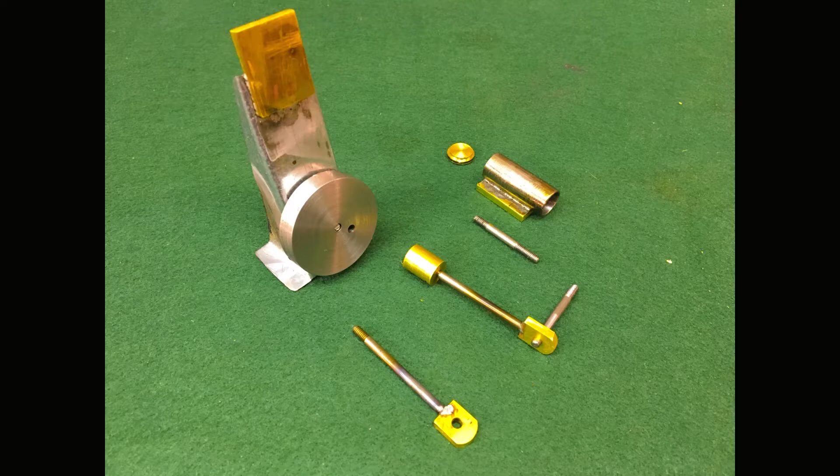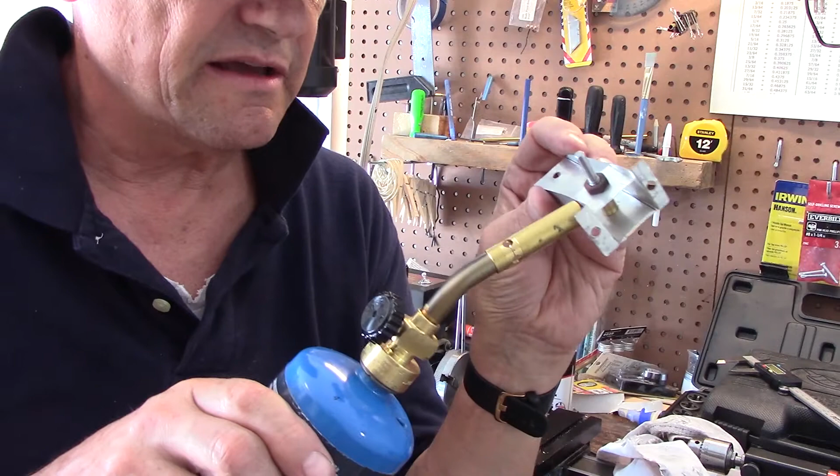These two are parallel. Now I'll take the Bernzomatic torch and solder that plate right in place. Once it's nice and soldered, I'll just take that out.

Okay, I'm drilling the other side. I moved it over a quarter of an inch, drilling the center hole. That's through.

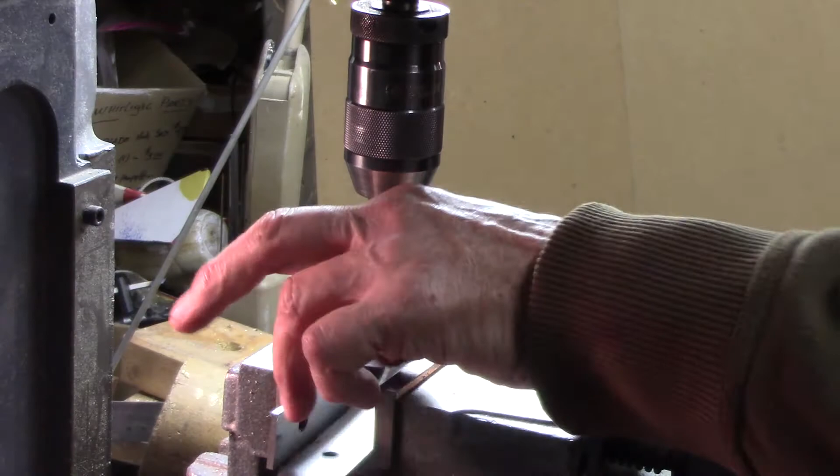Back over at the workbench, I got some 1/8 inch stock. I'm going to mark this off at 2 inches with the Sharpie, and then just hacksaw it off. That'll be the shaft, and the crank pin shows 3/4 of an inch, so I'll mark it off at 1 inch and trim it down to 3/4. All right, there's roughly 2 inches. Cut that first, put it in there.

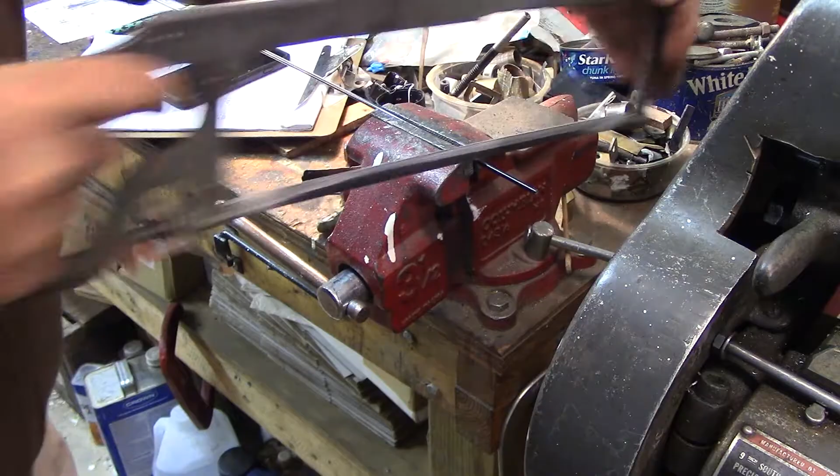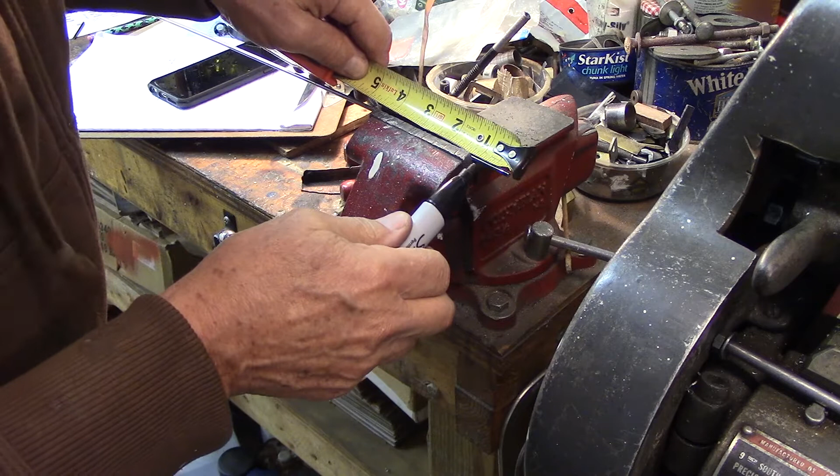Just mark it at 1 inch. Give it a little room.

We're back out in the shop this morning. It's a little chilly in Virginia, mostly rain though right now. The snow is all melted. I got the shop up to 55 degrees with the wood stove, and that's keeping my coffee warm.

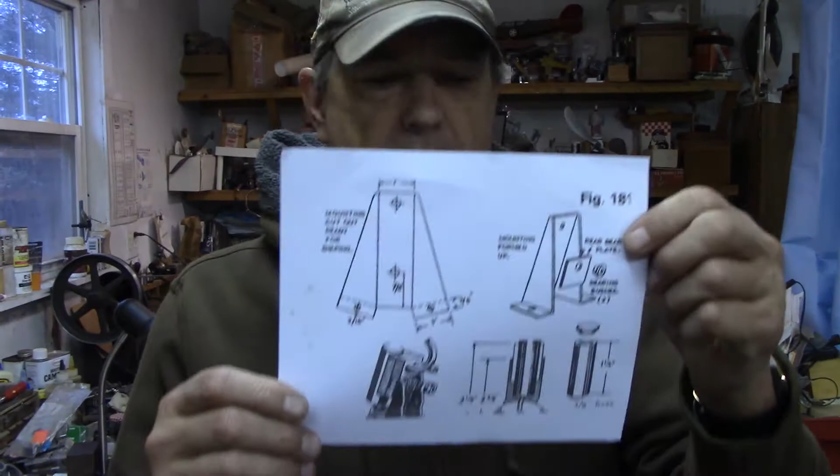So we're back to working on the little oscillating steam engine from Vic Smeed's boat book, Boat Modelling by Vic Smeed. This is the engine, this is the book, and this is the picture of the engine that was in the book. I blew it up.

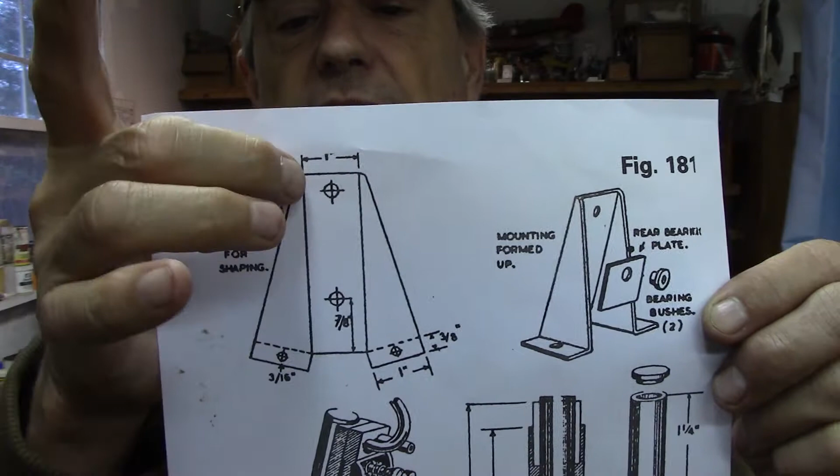So the frame of the engine is sheet metal, and I have discerned that it's about 3 inches by 1 inch on the main plate, because it shows 1 inch here and here. If you measure it out, it works out.

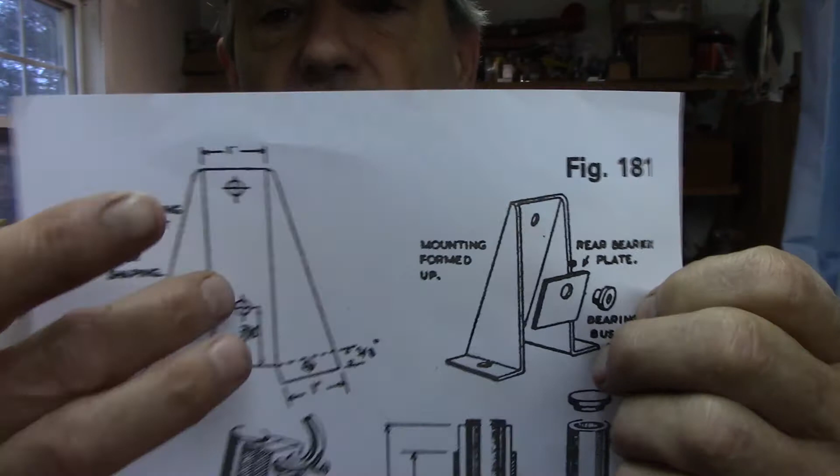So I'm going to fold that up today. I've already made one, but I think the metal was a little thin, so I'm going to try another one.

I've got a piece of sheet metal from ductwork underneath a house. We were doing some work on a house and had a lot of leftover at my house. So years ago—this piece is probably 10 years old. But it measures 19 thou, and it's pretty stout, and it solders easy.

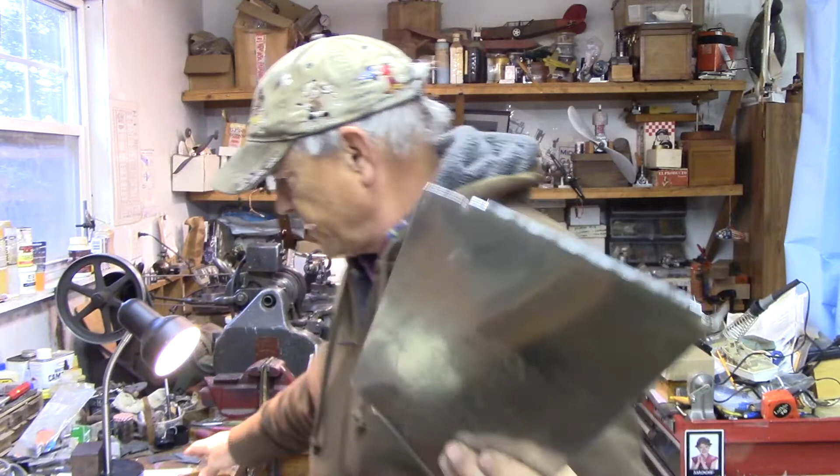You can cut it with regular aviation tin snips, which I have here. These are the straight ones. They make these in left, right, and straight.

I got to studying this diagram, and if you don't have 1-2-3 blocks, and you do any kind of layout work or model making, these things are great. They measure 3 by 2 by 1, and they're guaranteed parallel and 90 degrees on the edges, so you can just use them for everything.

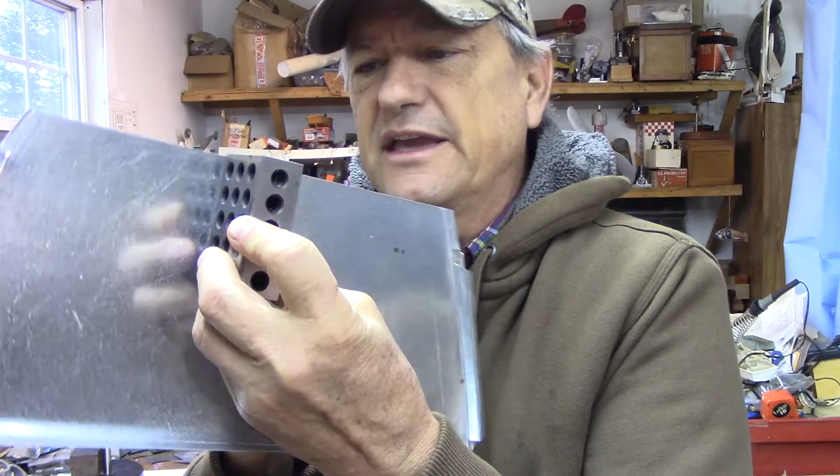So I'm looking at this diagram, and it's 3 by 1. I'm going to use a 1-2-3 block as a folding die—I don't know what you'd call it—a pattern to make a nice accurate little engine frame for this oscillating steam engine. Hopefully it'll look like this when I get through.

This drawing—a lot of the dimensions just aren't there. It was kind of an illustration in the book, I think for the author to illustrate what was possible to the reader.

But I think, combined with some other engines I've made, adding all that information together, I came up with a 3/8 inch bore. I have a little piece of 3/8 inch brass there—3/8 inch bore and a 1/2 inch stroke.

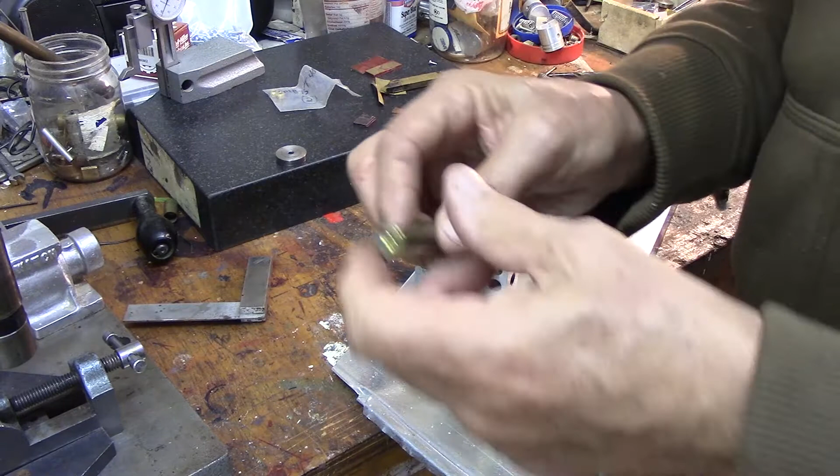I went to a reenactment a few years ago and picked up some of these blank shells. They were blanks, and they let you pick them up after the battle. These might make really interesting cylinders for the steam engine. I have several of them—I think I could cut them off and polish them up, and they'd make nice cylinders.

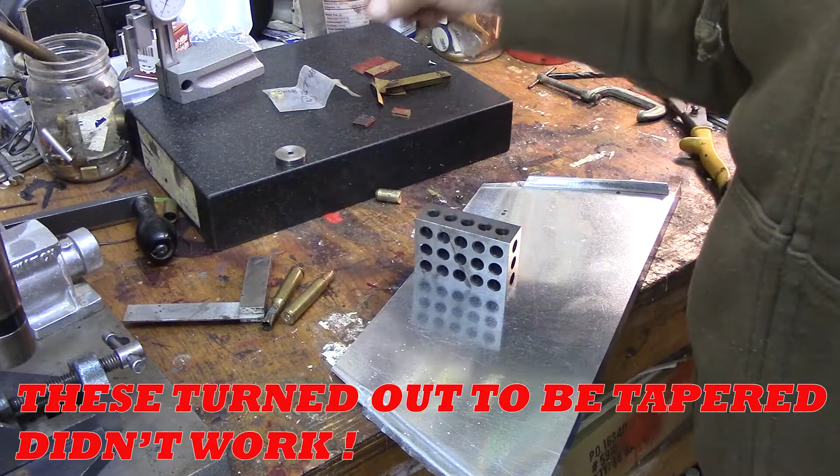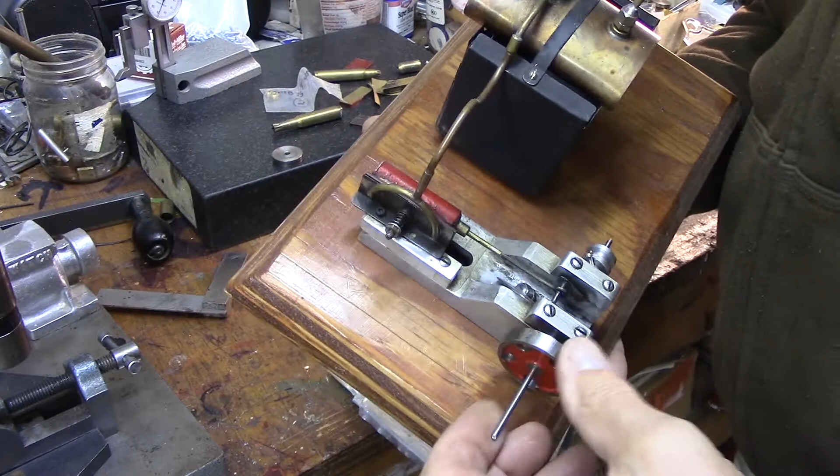Before I do this, I'm going to go get one of my other steam engines to show you the principle of how it runs. The engine design came from the FizzWiz, and it's an oscillating engine. The cool thing about this engine is it's double acting, so that's why both ends of the cylinder have to be sealed.

It has a 3/8 inch bore, but I used a steel cylinder plate, which of course is subject to rust. It works—I keep it oiled up, and it does run. It's dual acting; it's supposed to be self-starting.

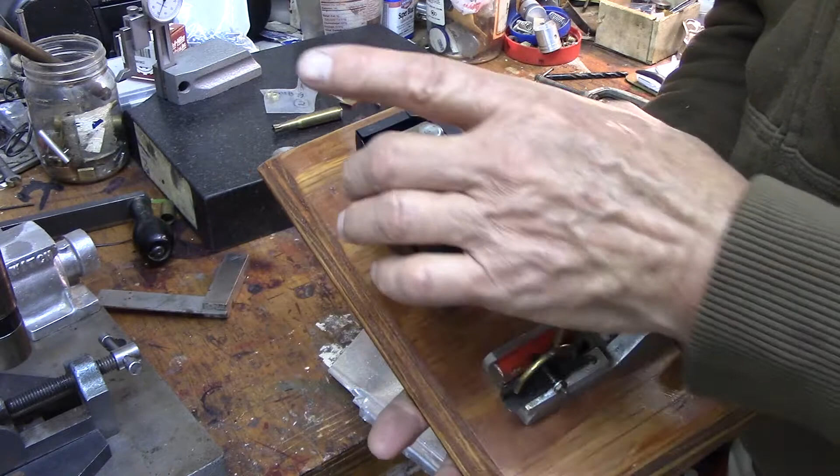I've got this little homemade boiler. I might do a little round boiler for this engine I'm making, because my intention is to put it in a small boat. But this is an oscillating engine, and it's going to be about the same size. The frame won't be the cast frame I have here—it's going to be sheet metal, and it's only going to be single acting, just to keep everything simple and easy.

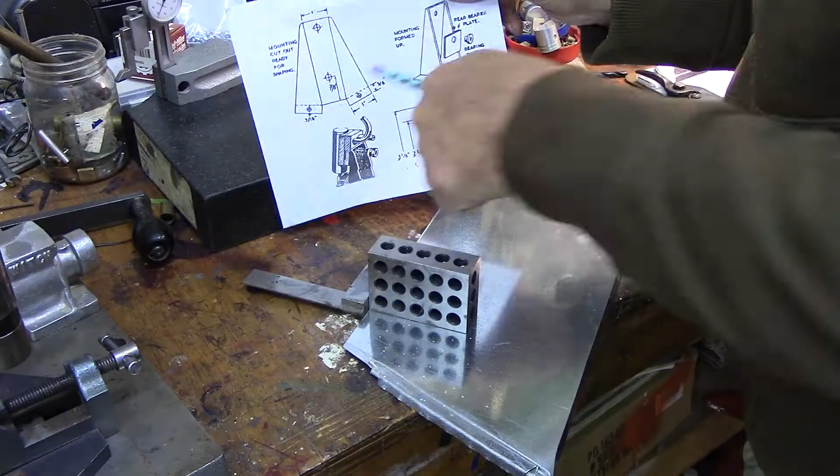I'm just going to lay out a rectangle and then put two kind of ears on it here using the 1-2-3 block. I'm not worried about getting so-called permanent magic marker on my 1-2-3 block, because all you need is some alcohol—I have a jar of denatured alcohol. Denatured alcohol will clean epoxy off your fingers too, by the way, if you get epoxy on your fingers.

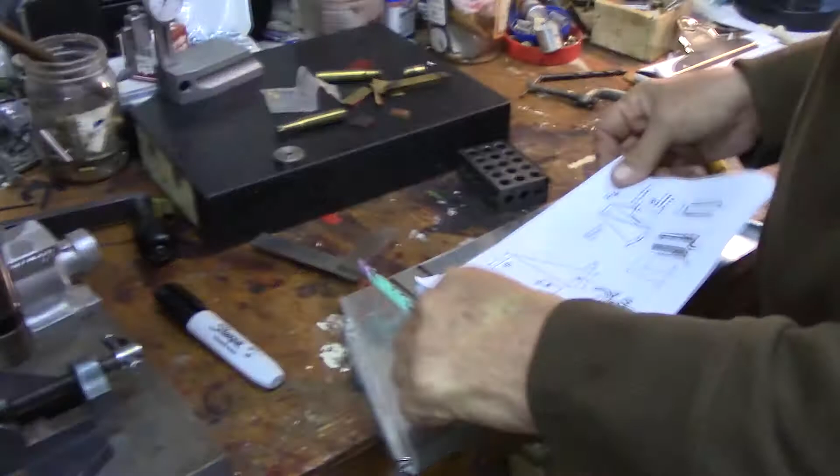So there's the layout—that's the start of the engine. Now I have to figure out what this angle is right here. It's kind of an odd angle, but it measures 73 degrees. I want my model engine to look like the picture, so the information's in there—you just have to get it out using the picture.

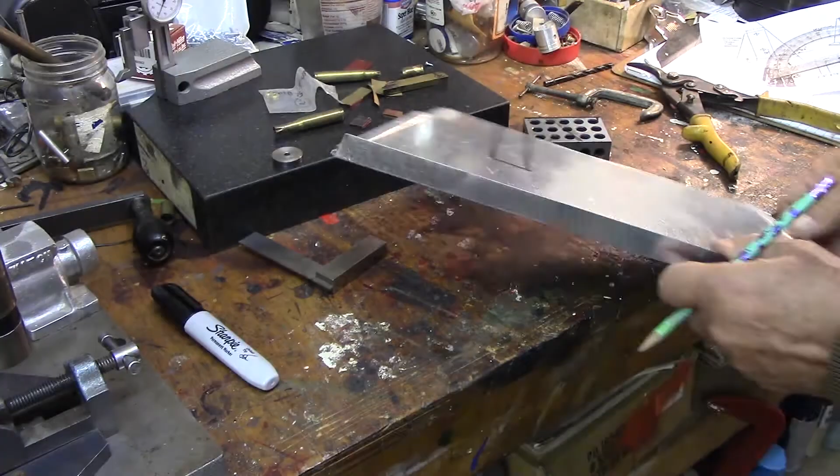Some denatured alcohol from Lowe's. Clean up your block too.

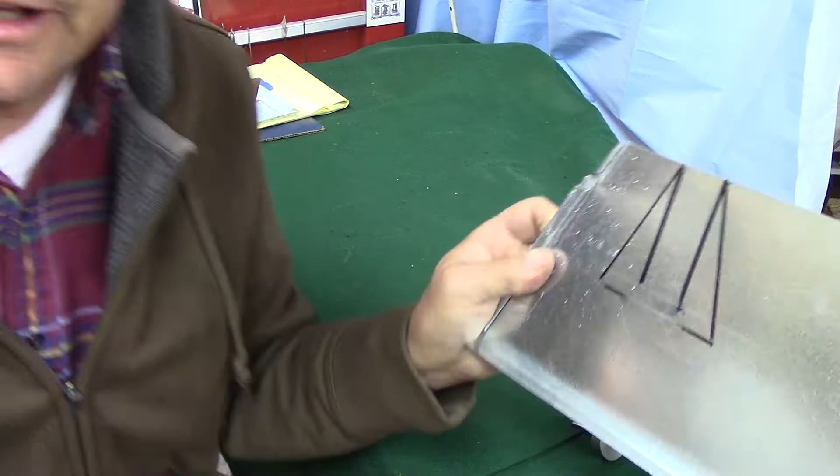Alright, I've got lines marked off that I can see adequately. As Jed Clampett used to say in the Beverly Hillbillies, I'm going to commence to whittling.

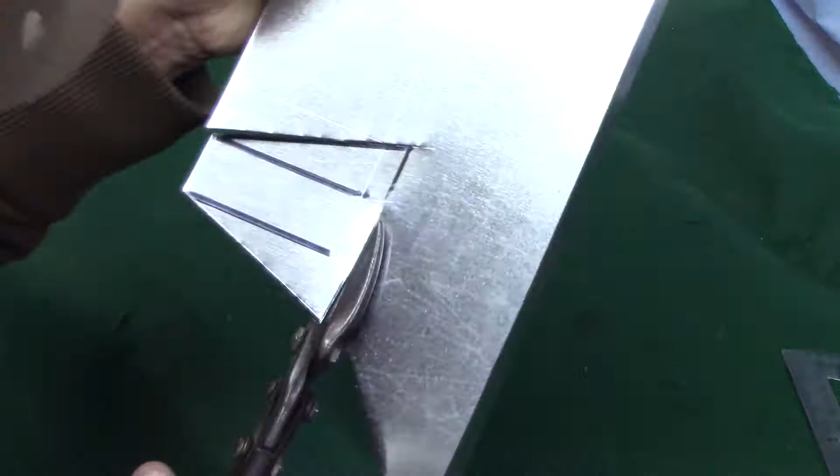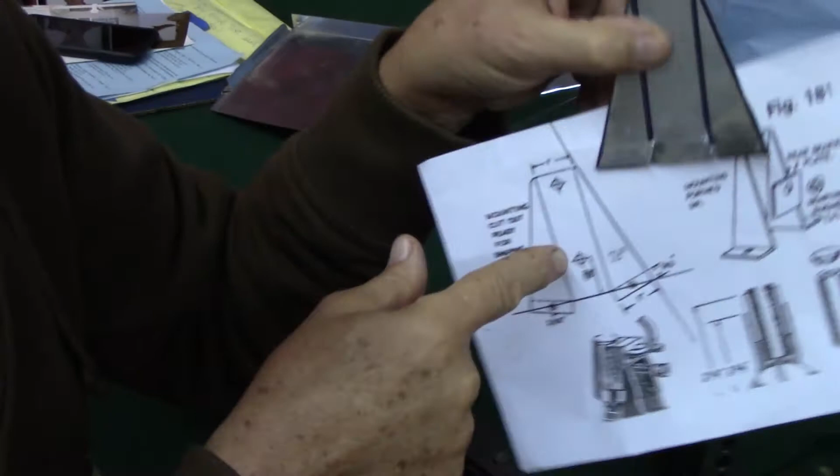There it is. Now another way to do this that I did on the first one I made, I just blew this up. I kept blowing this up on my printer until it measured 3 inches, and then I glued that pattern right onto a piece of metal.

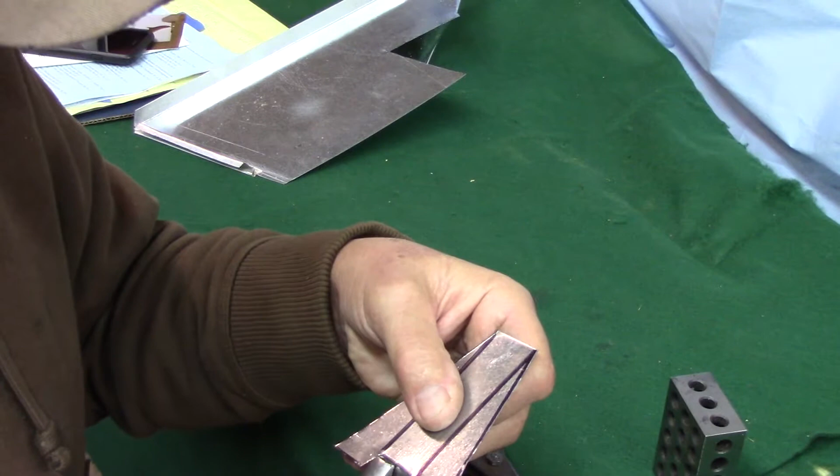Cut it out that way, and that worked. So this has to be cut off and these have to be bent 90 degrees. We do that in the vise, or we'll just do it with some pliers. You could use vice grips on this. Just snip this off.

This is going to be rough, but I'll clean it up on the grinder. These aren't too sharp. What a mess. I'll bend these in the vise.

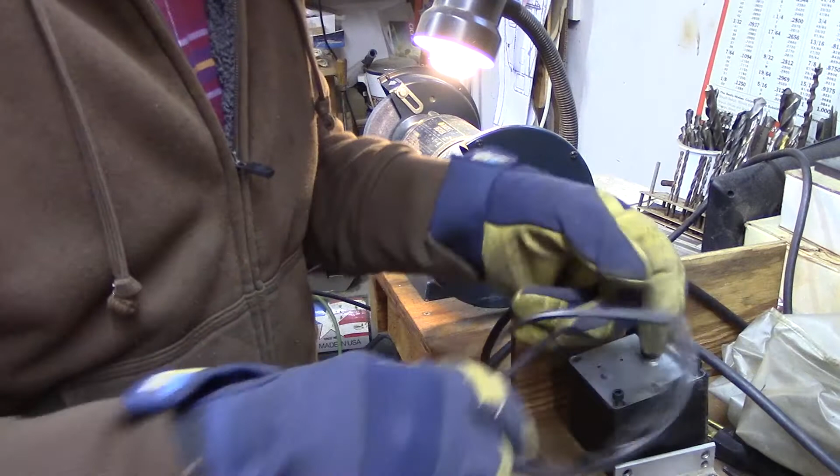Sheet metal work at the grinder's really dicey, so I'm wearing gloves because it'll get hot. Metal's sharp, and I'm wearing my safety goggles. Pretty good for now.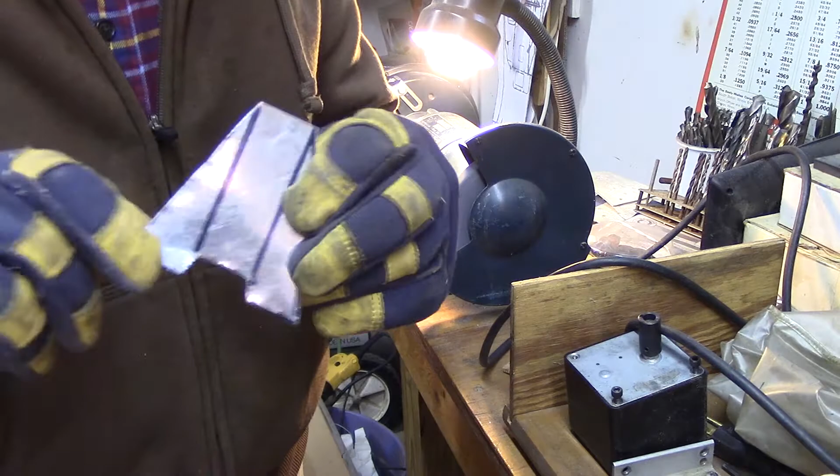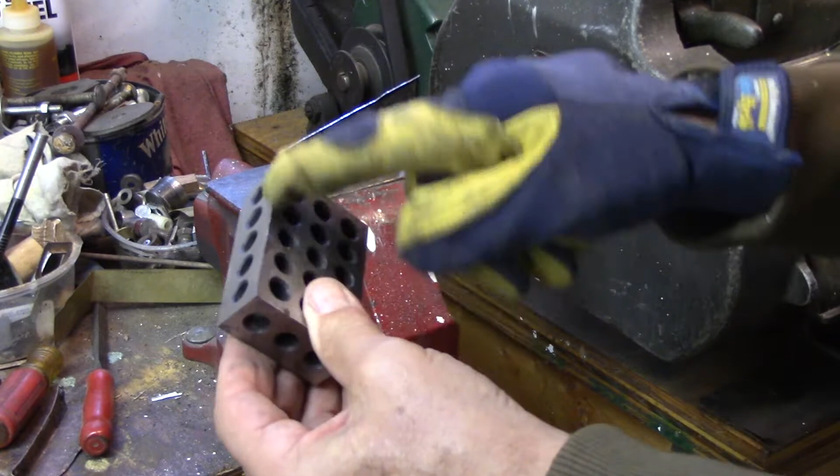I'm just going to start it here, then finish it with the 1-2-3 block because it has a nice square edge. I'm just going to start it on the vise here. I'll make sure to go the right way. Does it matter? I guess it doesn't matter as long as I do both of them the same direction.

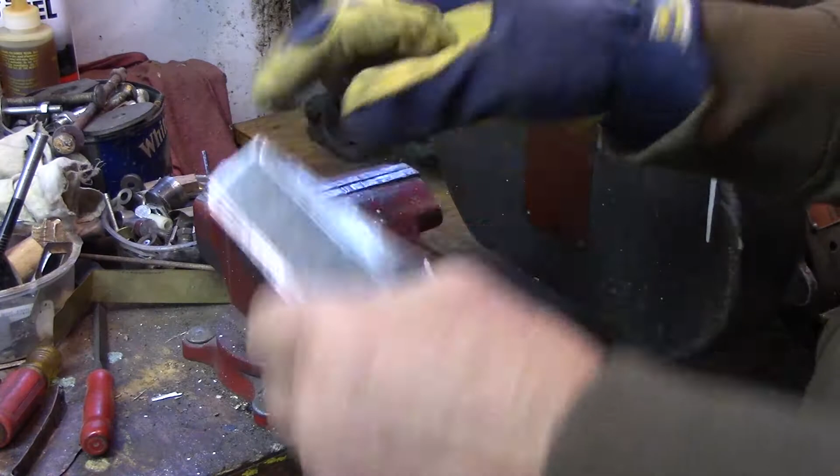That's pretty good. That's one. Important that this is parallel. Now you can't get it square because the geometry of the vise won't let you, so now you go to the 1-2-3 block.

Put my homemade soft jaws in here so I won't scratch up the 1-2-3 block. This was just a piece of copper pipe that I bent to make soft jaws so that it doesn't scratch stuff up when I put it in my steel vise jaws. Of course, you can buy soft jaws, plastic or aluminum soft jaws.

I hope that gives me enough room. Try something, try. I don't know if this will work or not. Oh, it's kind of making a mess.

I guess the pros would use a bending brake on this. Now I need to do these. Something doesn't look right on those tabs.

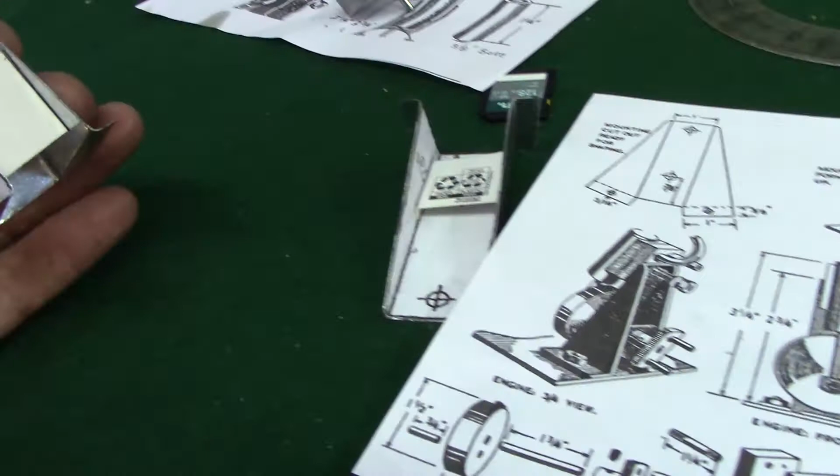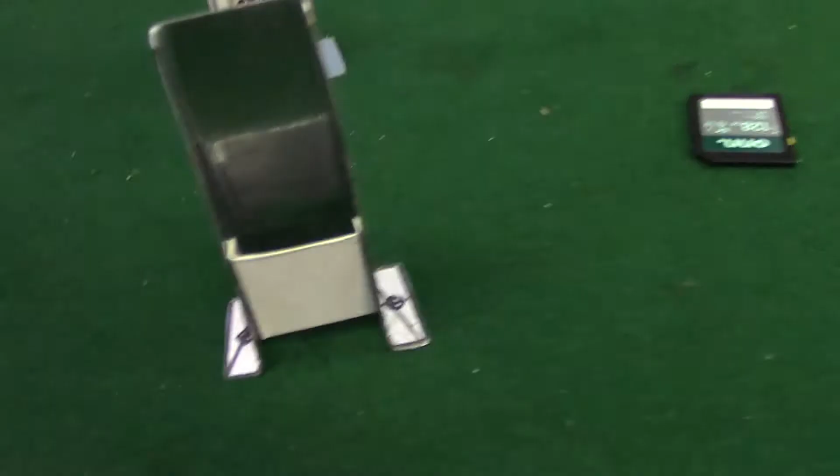So I have folded up two of the frames now. And the next step is to make this little piece here, this little back plate, which you can call the bearing holder, bearing support. They call it the rear bearing plate.

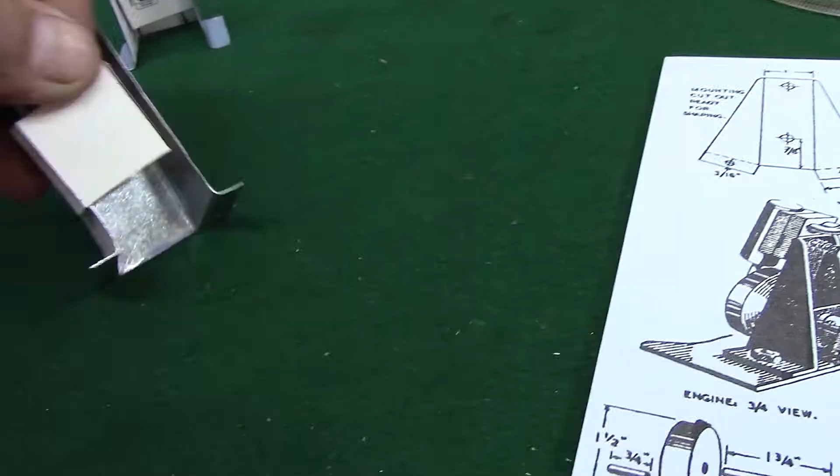So what I've done is take a piece of cardboard. The best cardstock is a cereal box, or I really like Premium Saltines - it's a great box. So I have a piece of cardboard, and I folded it so it fits in here exactly. And I put little ears on it here to hold the solder better, so when I solder it in, it has more surface area to hold.

So then I take these, bring it over here to the sheet metal, and using a scratch awl, I scratched these out, and cut them out pretty much 1 inch square, and then I added 1/8 of an inch on each end. So to get these bends to be nice and straight and even, I rigged up a little brake.

So I've got two cutting tools, like 3/4 inch high-speed steel, and then I've got the little piece of metal got in here at about 1/8 of an inch, and I'm going to just fold it over. So this is like a crude brake, right? A crude one.

Trying it on the other one. These didn't come out exactly the same width. It actually looks pretty good.

I'll clean that paper off before I solder it. I'll clean them up on the sander - I have a little tiny belt sander, and I'll clean those up.

Then we'll solder them on. Just a butane torch to solder these together, and then drill the holes. And once we drill the holes, I'll have to make some bushings - probably bronze or brass bushings that'll be soldered in, one on each side.

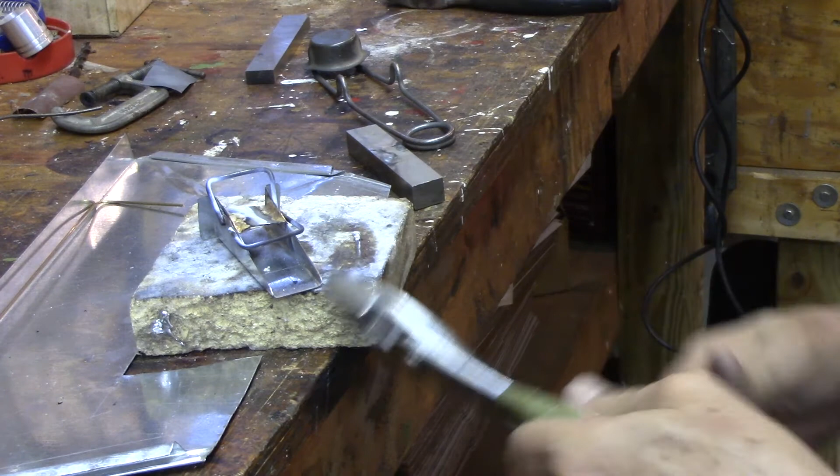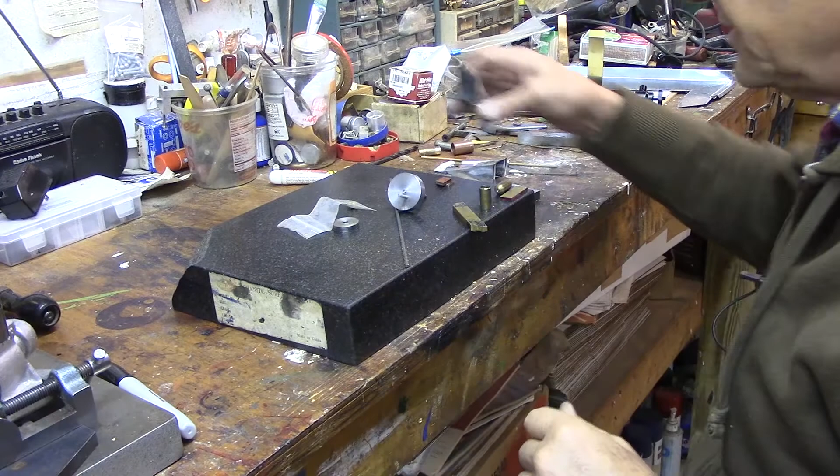That's the second one. Once it cools off, I'll hammer it a little bit, clean it up. Should be alright. Alright, so we've got these guys all brazed up.